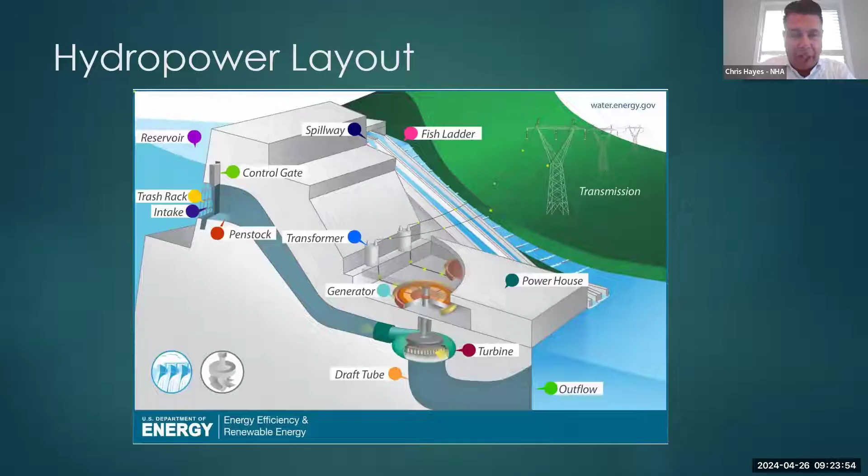And here's a nice picture of a facility operating as it should.

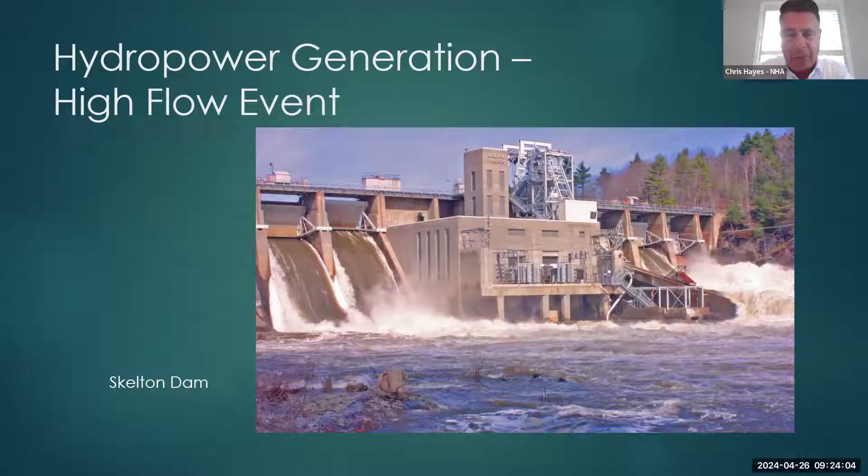So, paving the way for today's presentations, the goal is to identify technologies and innovations that may support the policy gaps identified in Workgroup 2, or shed light on other challenges that could be included in the workgroup's deliverables. Working Group 2 is looking forward to hearing from these presenters and gaining a sense of the options out there to address dam safety challenges.

The three presentations today will focus on how dam safety and natural hazards resilience can be enhanced through innovative collaborative technical assistance programs and emergency action planning; how innovative technologies for underwater dam assessments can improve infrastructure integrity, longevity, and safety; and how applying science-guided artificial intelligence can improve dam safety operations through enhanced forecasting and improved risk management. A very exciting lineup.

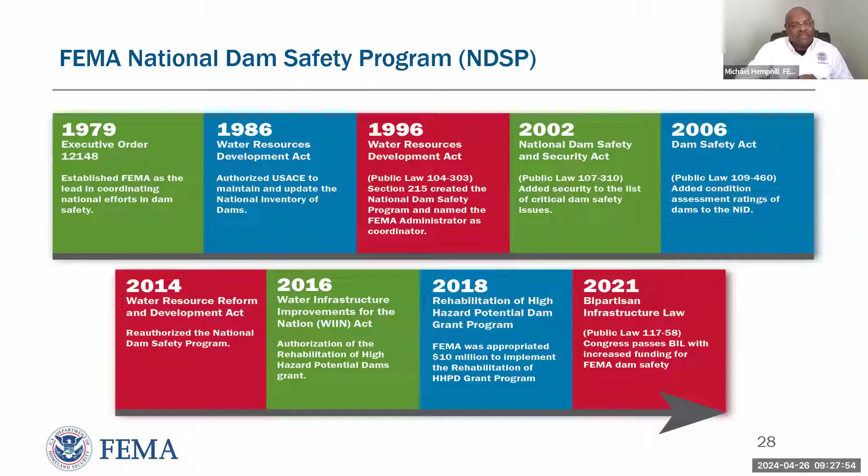Historically, the efforts of the National Dam Safety Program have been primarily focused on engineering. However, for the program to really evolve and be more comprehensive and effective in reducing the risk to life and property from dam failure, it's imperative that emergency managers, planners, floodplain managers, and emergency responders all become informed on national policy in dam risk reduction.

This is something that the Interagency Committee on Dam Safety and the National Dam Safety Program are really striving to do. Even though FEMA is the advisory committee for those entities, it is a national program, not FEMA's program. So we're very cognizant in making sure, and I'll explain this more when I get to the strategic plan, that all the activities we do are holistic, whole-community encompassing, to make sure all key players are at the table when guidance and recommendations are being developed.

As Mike mentioned, the Dam Safety Program aims to reduce the risk to life, property, and the environment from dam-related hazards, and we have 4 key pillars that we stand on. It's interesting because a lot of the things you all mentioned in the opening polls kind of hit within all 4 of these pillars.

So leadership through the National Dam Safety Review Board and Interagency Committee on Dam Safety, and FEMA is the lead for that. But as you know, we do not operate or own any dams. We are strictly in an advisory capacity, leading the collaboration between all the entities that do.

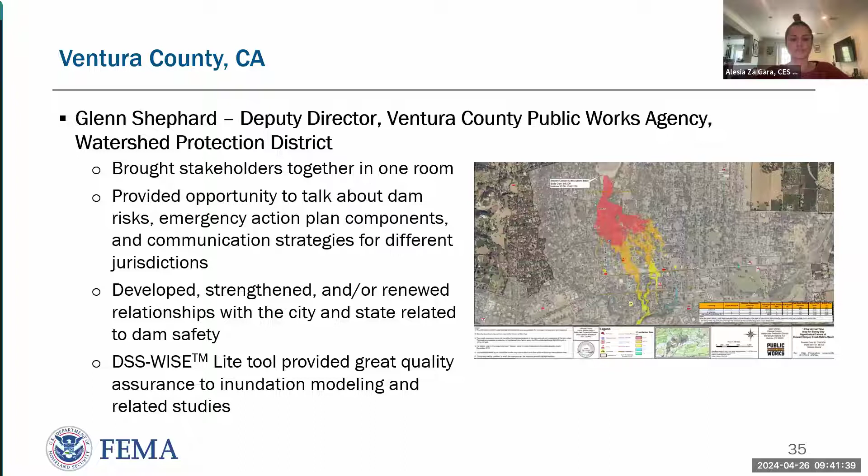Hi, Glenn Shephard, Deputy Public Works Agency Director for Ventura County, specifically the Watershed Protection District. An Emergency Action Plan is a formatted how-to in case a dam is experiencing a failure. Whether you're on one dam or multiple dams, it is key both to the state and anyone who has to plan for disasters. Our enduring relationships with FEMA, Cal OES, and the California Department of Water Resources embraced a new project for collaboration, and the CTA from FEMA allowed us all to come together in one room and talk through the risks and communication strategies affecting different jurisdictions and the emergency action components of how we plan and prepare for disasters. We're all strengthened in relationships either developed or renewed to allow for this project to be completed. DSS-WISE, the FEMA tool, was a great addition, and from a technical assistance standpoint provided great and wonderful quality assurance to modeling and inundation study. We appreciate FEMA bringing CTA to our attention, and with our state and other city partners, it has really strengthened our relationships as it relates to dam safety and communication of risk and responding to a potential failure.

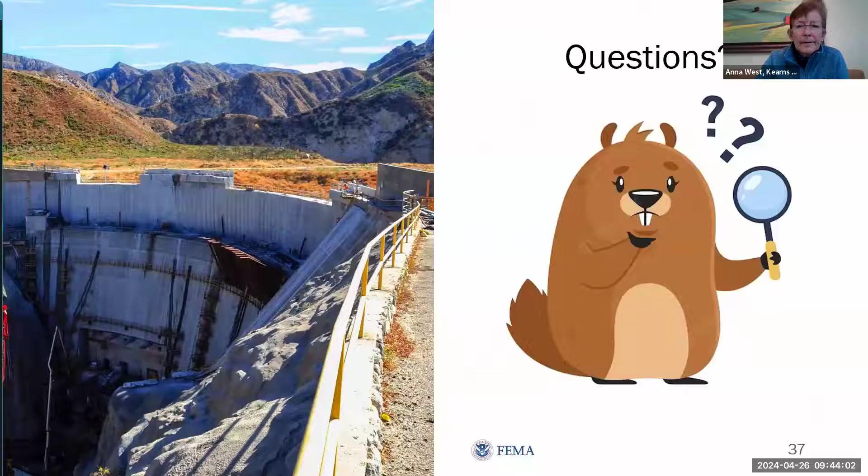Not seeing any hands go up. Okay, well then let's go into our poll everywhere. If everybody could go back to the poll, however you entered via mobile phone or computer. First question is, how could we advance, adopt, or scale the use of the CTA, the assistance program? How can that be advanced or improve the use of it? Looks like people are typing.

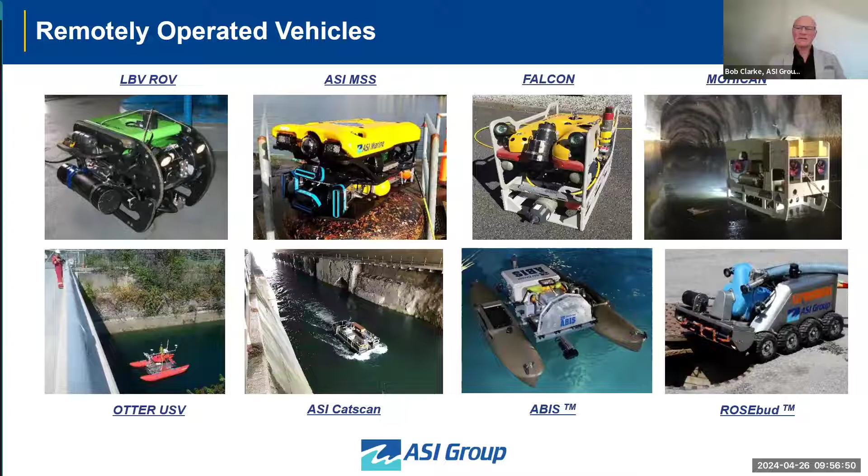It was quite the entertainment when we hit the go button because it took off like a shot up the canal and pretty much navigated itself all the way through for the next 4 or 5 hours by itself. We would monitor it, and if need be, we could jump on just like remote desktop and control it. If it got really sticky, we could run up and do an RC control, radio control, and visually operate it directly. Worst comes to worst, we could shut everything off and do a full manual override. So it could operate in 4 different ways. It was an amazing piece of technology developed for a specific project and has been leveraged for projects since then as well. Next slide, please.

And the benefit of that is it's measurable, so it is true 3D. We can measure - this is roughly an 18-inch pipe. So that's a double check.

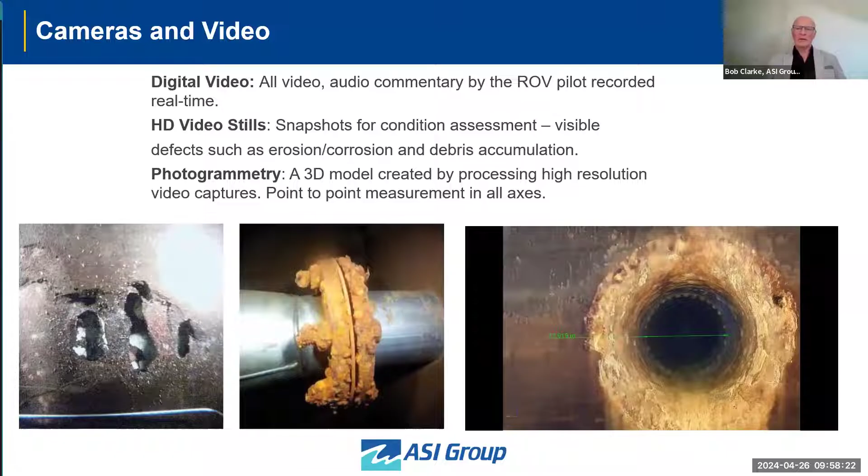Where we don't have great visibility, or where we're looking to cover a very large area, we'll use sonar systems. Sonar is sound - it emits a pulse, comes back, and the sensor receives that signal, that reflection. There's 2D and there's 3D. 2D is like taking a flashlight, shining it across your tabletop, and you get reflections back - bright spots, dark spots. 3D is instead of shining that fan of light across the desktop, we're now shooting a single, very precise, well-defined pulse of sound, and that goes back, hits the target, comes to the sonar, and brings back a point value in X, Y, and Z space.

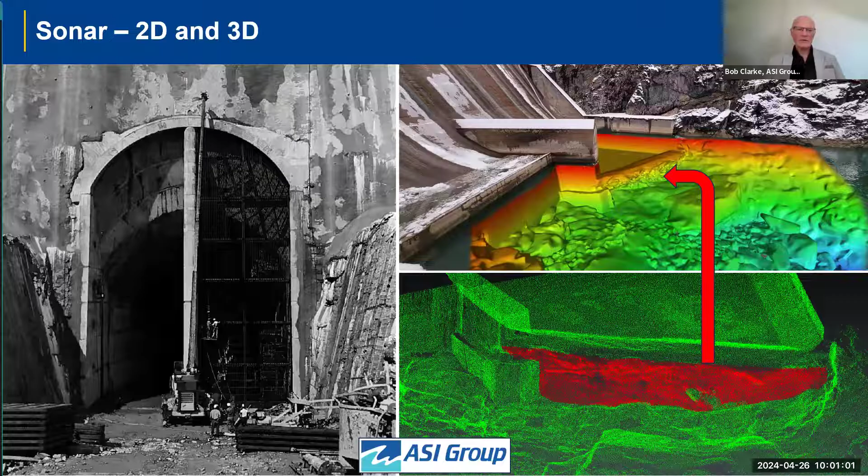The client reached out to us, wanted to apply some new technology, had heard about this sonar thing. So we said sure - transition to the sonar image, please. We went down, and we had to inform the client that, by the way, you don't have any trash racks - they have all collapsed.

With respect to diver safety, it's a huge risk putting divers in when the barrier that's meant to protect them isn't there. Obviously, lockout tagout would have to be done for diver protection. For putting a robot in, it's not as critical, so we can do a lockout without having to go to the full extent. Usually, if we're doing multiple intake units with a diver, the adjacent units have to be locked out as well. With an ROV, we can do a lockout on the single unit, and the other ones generally are left operational, and we can manage the vehicle accordingly.

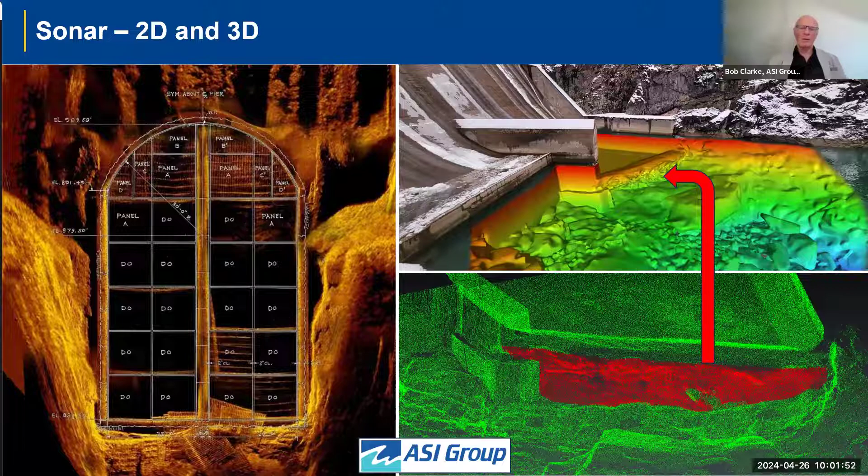You'll see the white drawing put over top - it just helps put everything into context again, so the client knows exactly what's where.

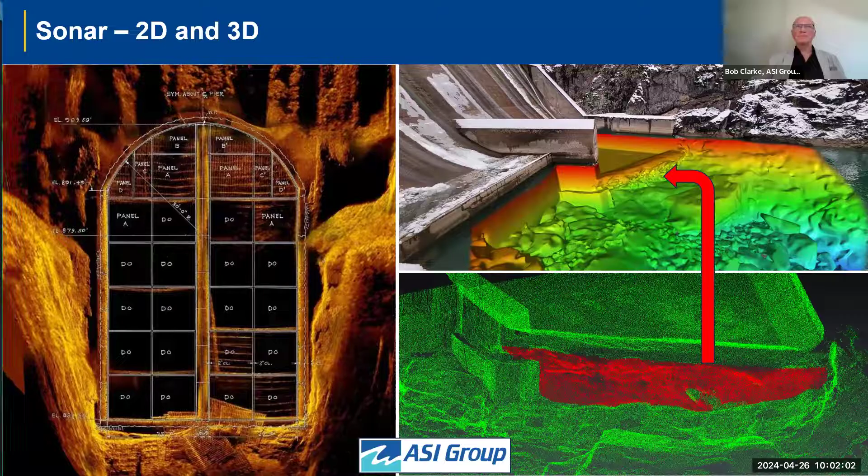This work was done when the area was isolated for safety, because we did use a manned vessel through there.

This puts the whole area into context, something a diver can't do by feel and touch and relaying. There's also more detail. The shadowing and banding in there is just an artifact from creating the image from multiple smaller images stitched together.

But when you really zoom in, you can see individual pieces of rebar in some of those images. The progression of the technology is phenomenal. Some sonar systems now get down to 1/8 of an inch, being able to see that level of detail. It's very impressive.

One of the big applications for long tunnel work, and even for open water areas, is surveying for debris. At the trash racks, we've done many projects where we just go down and check that the trash racks are fine. Like the previous example, those trash racks had failed completely, which was a structural issue of the support beams. Other areas are when debris piles up against the trash rack, overloading it so the head pressure creates significant stress on the structure.

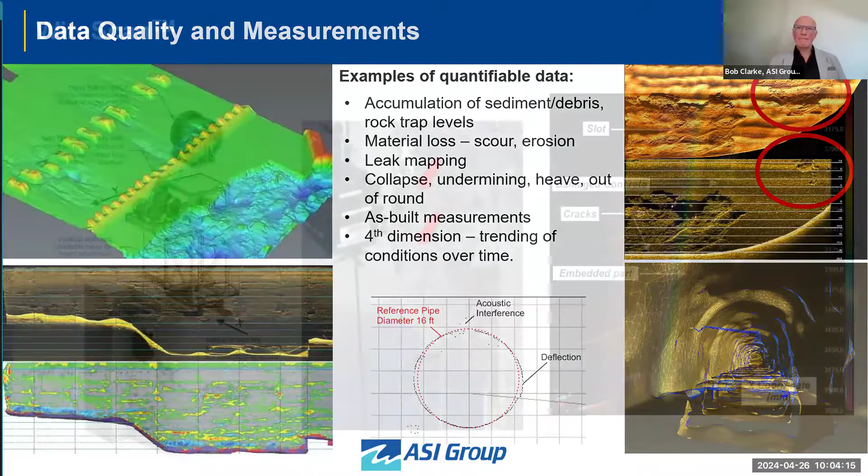As mentioned, some sonar systems measure down to 1/8 of an inch, and you can see little defects. This WireScan system is a bespoke engineering solution developed by Hydro-Quebec that measures down to 1 millimeter.

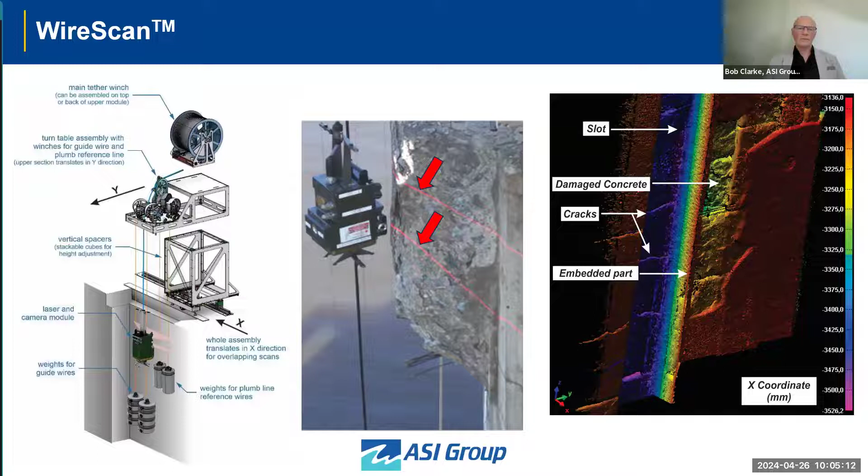As Chris mentioned earlier, being able to operate your gates under an emergency is critical. By taking these highly accurate measurements to a millimeter, Hydro-Quebec ensures their facilities operate as intended and when intended. So knowing the true verticality of those gates and slots, any deformation caused by impact, swelling concrete, or differential settlement, they know prior to even trying to install the gates and slots. ASI has commercialized this, so it's now available outside of Hydro-Quebec, and we've done several projects throughout North America for the owners.

Leaks through dams are obviously a very major concern. Historically, divers would go down and very cautiously wave telltales or bits of string in front of them as they went around looking for a leak.

Finding leaks on a dam is one of the most hazardous things for commercial divers, in fact one of the leading causes of fatalities. With even just a little bit of pressure, the diver can get stuck up where that leak is and cannot come off. So being able to do it with robotics and remote technology provides huge savings and a huge safety factor, especially if there's no visibility.

The examples shown here include telltales and dye injection. For larger areas where we may not have visibility, we'll listen for the leaks using hydrophones. If there's a pressure differential, there's going to be a sound.

The sample on the right is from a survey done in a very large tunnel, 13 feet in diameter. We're not going to look for that needle in a haystack going up and down searching for leaks like we did before, which is a very time-consuming process. Now with the hydrophones, we can deploy the full array, go through the tunnel listening for leaks, map them all out, and then go back to visually confirm. We don't have to look for them, we're listening for them as we go through.

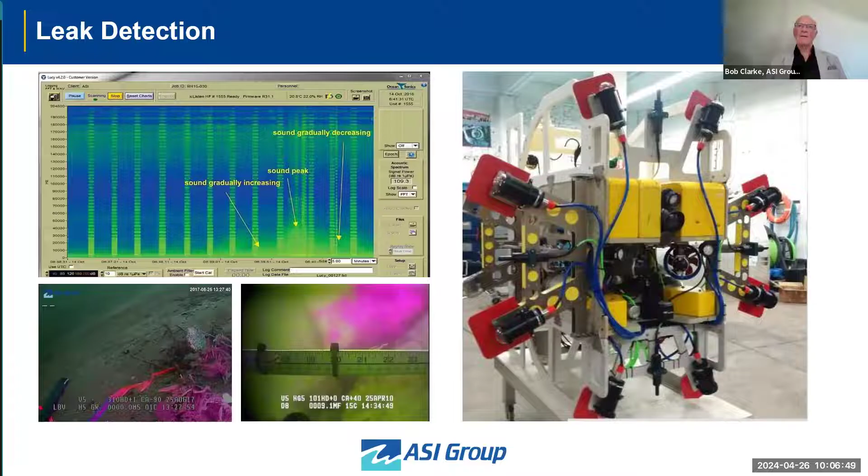This is the most recent bit of technology that we've brought to market, through a partnership with Vector Construction Services, NDT division. We are now able to test concrete integrity underwater without having to core. It's a non-destructive method: we put transducers against the wall, impart an energy, and listen for it. Based on how that signal is received by the other transducers, we can determine the strength of the concrete and where there's a liner thickness, including the residual thickness in the concrete.

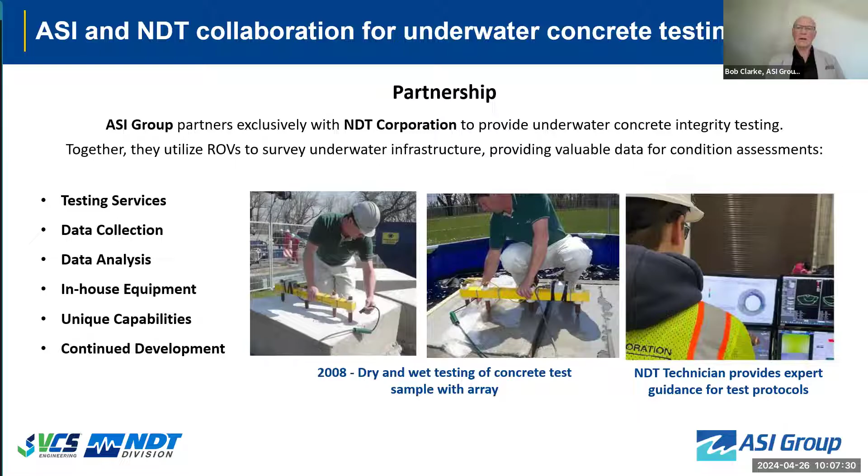Just an example of some of the research and development—about a 1.5 year program. Some of the beta testing is shown on the left side, and it's finally integrated onto a remotely operated vehicle. It's been used for an assessment, which was a very interesting project. Aging infrastructure and life extension programs are a big thing—owners want to know if the concrete is still good, or if redesigning and repurposing, what is the strength of the concrete. That's where this project was done, shown on the right side.

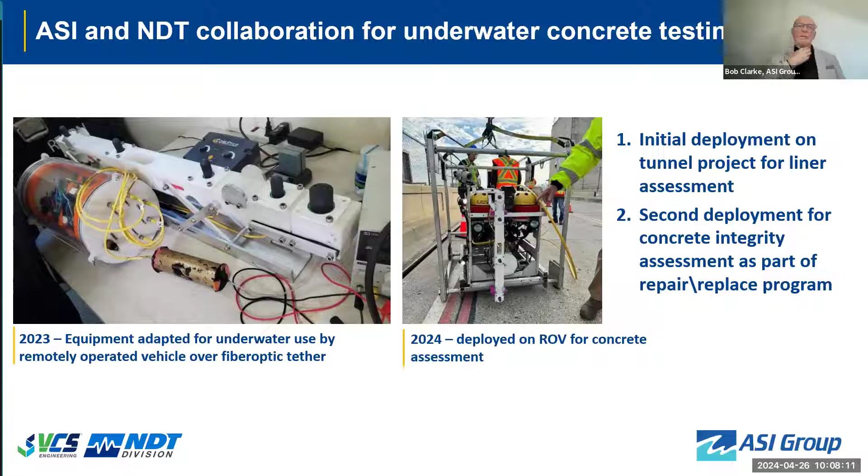We're able to go down and collect multiple points, highlighting them in a table for the owners and their engineers. Everything in red was below the criteria set by their design team, and they're able to do their design based on real information as opposed to assumptions.

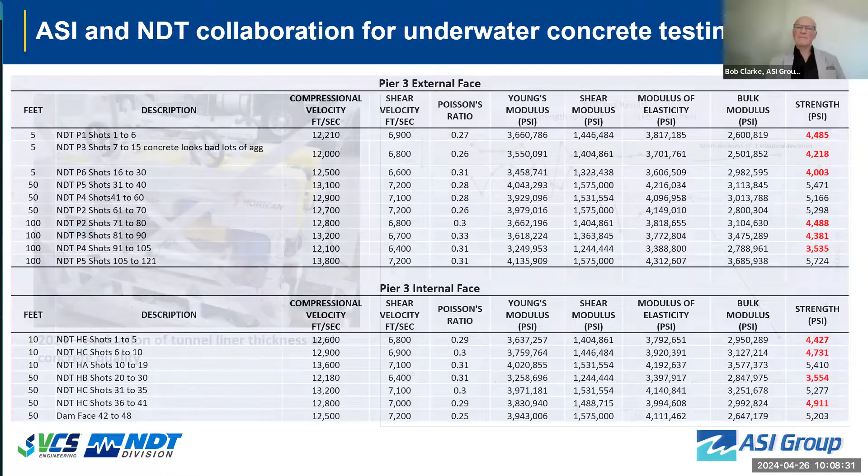This was specifically made to be integrated onto robotic vehicles, so we're now capable of going 8 miles into a tunnel and still doing concrete assessment the whole way. This project was a shorter tunnel, only 18,000 feet, but we were able to go in and do liner thicknesses and concrete strength. Generally, the values that come back are within 500 psi of test and calibration cores. It's a great way to do concrete assessment non-destructively and quite quickly, in areas simply inaccessible to divers.

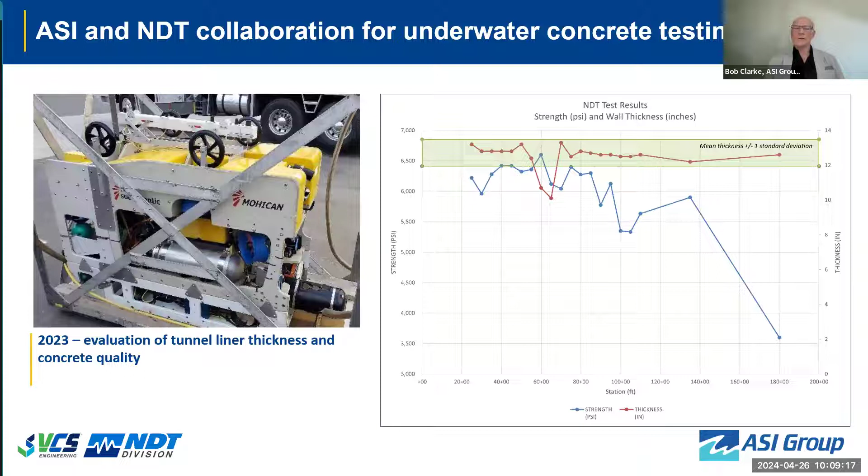And pretty much wrapping the presentation up—it's not just about getting data, it's about actually doing work as well. The robotic vehicles can be modified to help go in and repair directly, or even to assist with repairs.

One of our highlight projects was down in South America at the Cheves Power Station plant in Peru, where they had leaking piping from their penstock. In order to isolate that piping, they wanted to decommission it all, and the only way to do that was to put a plug in from the inside of the penstock. That location was roughly 6 miles down a tunnel and close to 2,000 feet of water depth. There was no other way of doing it unless they dewatered the whole facility, which is unsafe—they would also have lost revenue and faced a host of other issues.

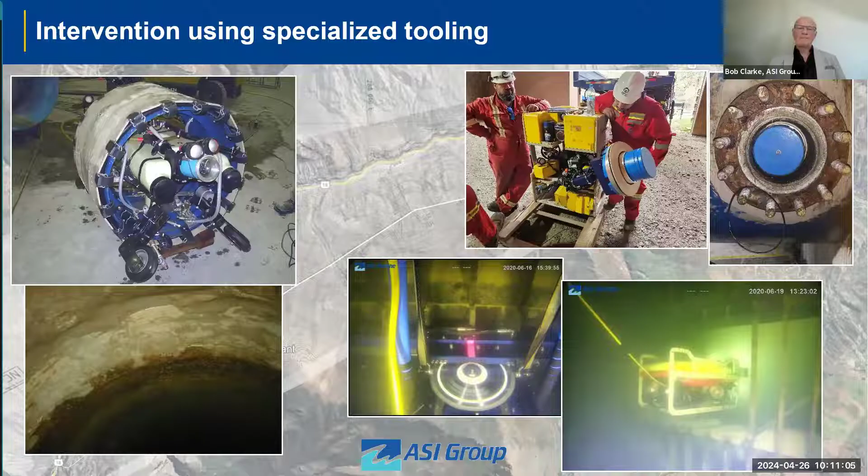So basically, just summarizing: robotic systems and remote technology can be used in areas that are inaccessible for conventional means and divers, and or areas that are high risk.

It's data that can be acquired on the inspection side of things that's recorded and logged. Now you've got a history, so over time comparative analysis can be made to see if there's progression of anomalies, or hopefully everything's fine. But now it's also documented.

Having that information goes a long way with insurance as well, because now it's a two-sided juggle: owners can demonstrate to their insurance agencies that we've inspected everything and it's fine, and the insurers can now mandate that it be inspected, which also ensures their risk is fine.

One of the things with the technology, especially the long distance aspects, is that FERC used to be able to grant waivers for long tunnel systems because the technology wasn't there. It was very cost prohibitive to dewater these things, so waivers were granted—don't worry, if it's still working, then that should be fine.

Now the technology is there, there is more of a push to require inspections for these types of things. And just again, in summary, it's not just the acquisition of data, but also the ability to do some actual work, intervention, and assist with repairs and maintenance.

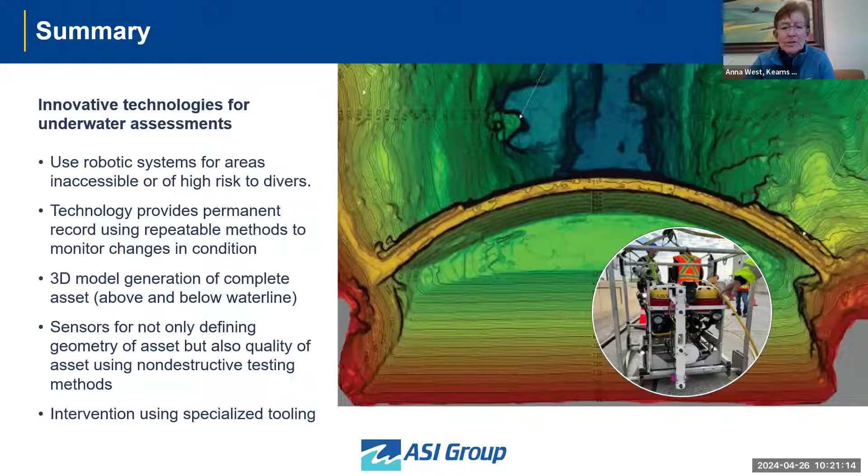So we're kind of having the conversation about how do we advance, adopt, or scale the use of all these technologies Bob's shared with us. If participants have ideas, please fill it in. And Bob, do you want to try to answer that? I think that, as mentioned, these types of programs are key. It's just getting the information out there.

Been attending trade shows since joining ASI, and it is interesting. Clients have rotation of personnel, so new people come in and they're not aware of it. So now they get introduced to the technology, and even those familiar with it get the updates as to what's new. That's one of the things with a service provider.

The service provider has to maintain state-of-the-art equipment. It's not uncommon that owner operators, they can do that - they go buy the equipment. Problem is they don't have to maintain state-of-the-art equipment, and they also have higher turnover than a service company would. It's not uncommon that owner operators buy a small ROV, which is great for something quick and dirty, but then they start progressing and getting more advanced systems that they don't know how to maintain. It's not operated on a daily basis, and people lose their expertise with it.

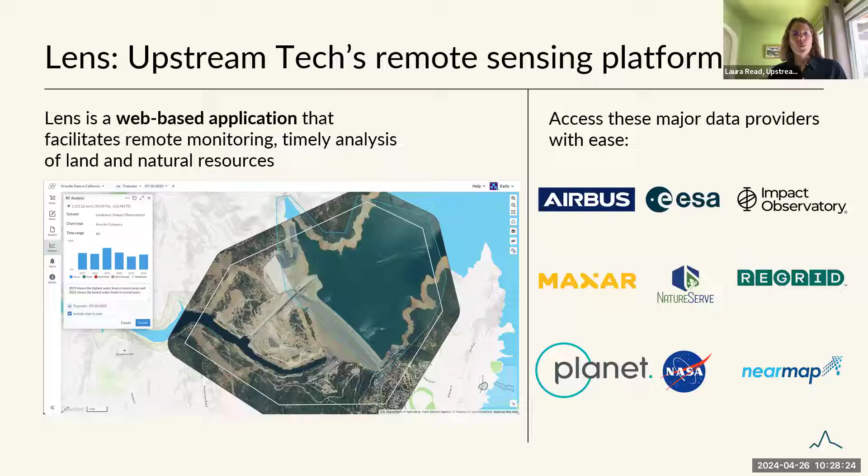Just one quick note on Lens. Lens is our other product, the one I won't focus on today, but essentially it is a remote sensing platform that folks are using to monitor different types of land or water, shoreline, or land that they need to monitor remotely because it's difficult to get there, or they need really specific high resolution analytics and data. So these are some of the data sources that we pull in and make into a really easy to use platform.

So motivation for HydroForecast - why did we build it and what is it? Essentially two pieces came together to create a perfect storm for building this product. The first is that managing water is really difficult, and it's becoming more difficult if you're in an area experiencing changes in climate and variability. Lots of high-profile news stories show how difficult it is to manage water through events and droughts. The other piece is that water is used and is becoming an even bigger part of the pie for power and electricity generation.

So we have these things happening, and we also have advancements in computers, technology, and AI. Folks are fundamentally making different types of models because more data and faster technology is available. So the question is, how can we use that in conjunction with the water and energy crisis to really move the needle to help with managing these challenges we face globally?

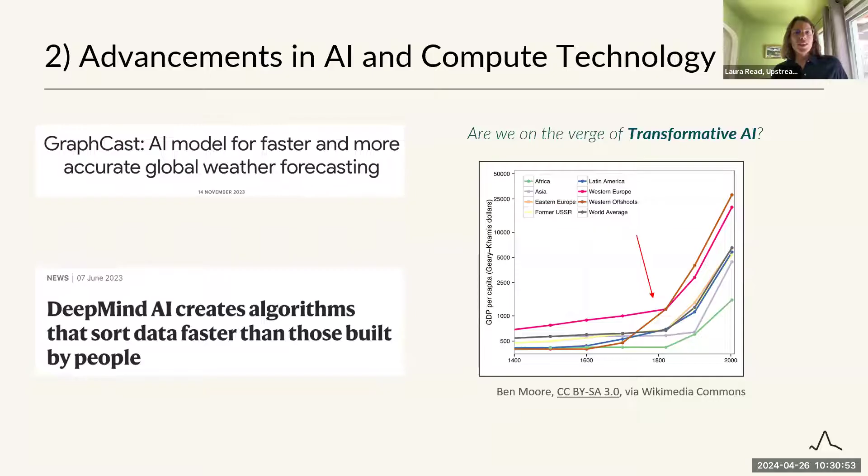So the culmination of water challenges and needing better information to manage our water, especially as water becomes more precious from a power perspective, plus the availability and advancements of computers and AI - what can we do with that to leverage both? HydroForecast is essentially our answer to that. We've built a model in a fundamentally different way using AI and neural networks that can be used for better predictions of water, stream flow, inflows into reservoirs, etc. And from there, even other renewables - how can we forecast those as well so that we can help build that portfolio of a reliable grid?

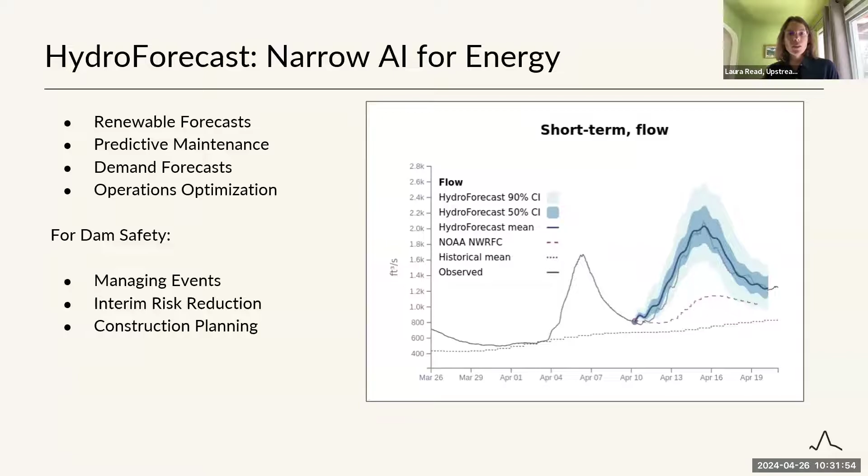So today, in the remaining part of this talk, I'm going to show some examples of how folks are currently using our forecasts for managing dam safety - in terms of events, construction planning, and interim risk reduction. Before getting to those applications, let me briefly describe a little bit about HydroForecast and what makes it unique.

So briefly, in a one slide summary, essentially what we've done with HydroForecast is said, there's this way that we've always built hydrologic models. Hydrologic models meaning you're able to predict stream flow and use that prediction to manage your water. The question is, how can we take a new type of model and some of the advancements in data availability, neural network speeds at which you can run experiments and integrate new R&D, and see if we can train a model to learn hydrology in a fundamentally different way.

So here on the left, I'm showing what we do in terms of weather sources. Our model takes into account 4 different weather sources and uses that precipitation, temperature, humidity, all the things that drive hydrologic prediction, but it uses more of them, and it's actually trained on them. So it learns how to deal with the errors and the biases.

It also pulls in, in the bottom left there, snow observations, satellite information. So we're using that in real time. And that's all possible because that data is now more reliable, it's coming in faster, more frequent, and it's better quality.

So we're pulling those things in a way that helps train a really big model to learn hydrology fundamentally. And when it does that, then we can go use local information and build a really, really accurate, specific model. So that's what I'm showing here, how we leverage all those different weather technologies and sources with remote sensing sources to build hydrologic prediction.

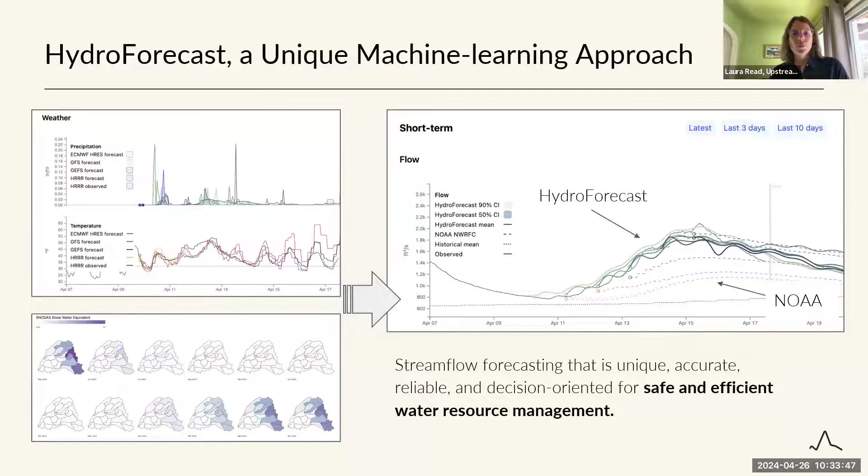And so over on the right, it's just an example of our forecasts over a big spring event compared with what else is out there from NOAA. Next slide. And so the question is, does it work?

One answer to that is that we were put in a year-long competition called a forecast rodeo. Everybody submitted their forecasts every day for a year across 19 sites. A third party validated these results, and different players, public and private folks, entered this competition. Our forecast did pretty well across the different locations. For a small company like us that's trying out this new technology and trying to innovate in this space and build that community, this was a really important milestone for us.

Next slide. We work with folks, and basically after that competition, and as we've started working with customers, we have lots of different customers in the utility space globally and across 14 countries, including folks that work on the power supply side and also just water supply.

I'll focus today on showing some examples from our short-term model because that's the most applicable time horizon for dam safety. But we also have seasonal forecasts and a long-term projection that goes out to 2100 to understand how flows can change in terms of future long-term out projections.

Next slide. So I'll walk through two different applications. The first one is with Tacoma Power. They're one of our customers, we work with them. They have snow and rain-driven basins up in the Northwest United States, just south of Tacoma, Washington. And they have some basins that have downstream consequences for floods.

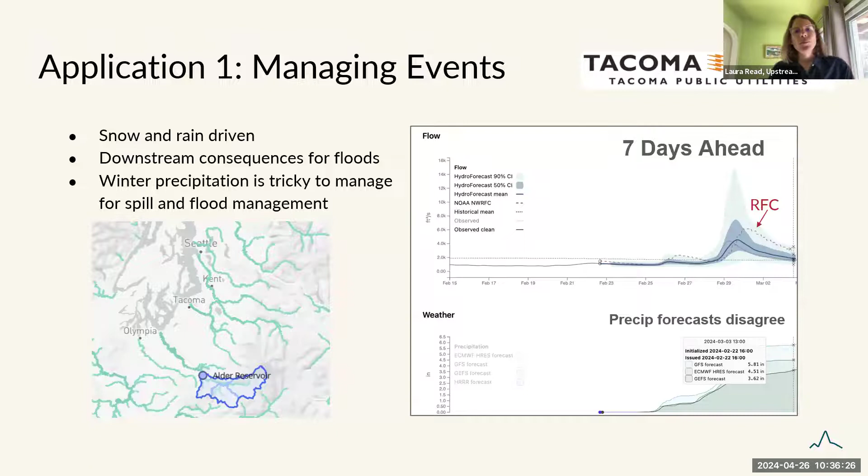Okay, next slide. So yeah, the second application is we have a customer named Valley Water.

They're in the Bay Area of San Francisco, and they are using our forecast for managing events as well as construction. They're doing construction on some of their facilities, and that can be a really critical time for having an accurate forecast. They're a little bit different than Tacoma Power.

They're in a really urbanized area, very flashy basin, and they're also responsible for helping issue emergency warnings if they were to have an event that could put a downstream population at risk. Flows can go from 20 CFS to 1,000 CFS when they get atmospheric rivers, so it's a very difficult area to forecast.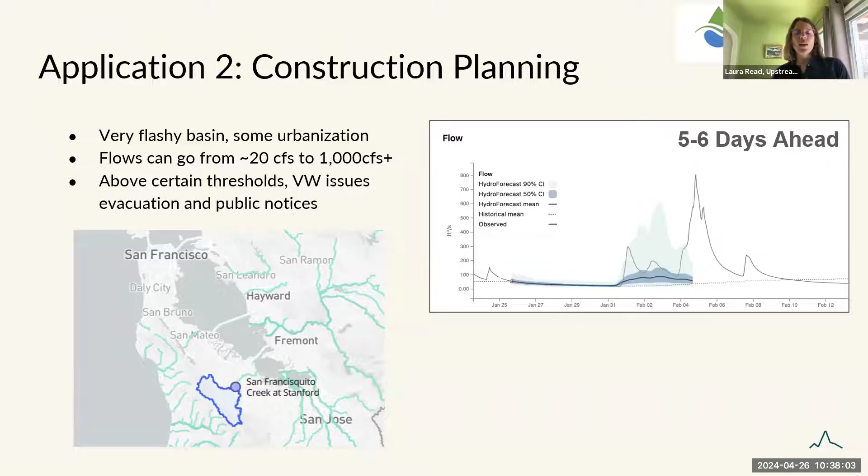Here I'm just showing, this was over the recent winter, an atmospheric event comes in 5 to 6 days ahead. You can see something's coming with that 90% confidence bound. Next slide.

And then as we get closer, 2 days ahead, and then with that second peak, the model is able to pick up, especially within the 50% confidence bound, the likelihood of having a serious event. You can see the flows up to almost 1,000 CFS there.

So what this means to our customer is basically being able to prepare for this and make sure there's no equipment, no folks out in the rivers. They can start working with their emergency management a little bit earlier to maintain safety around these events. Okay, next slide.

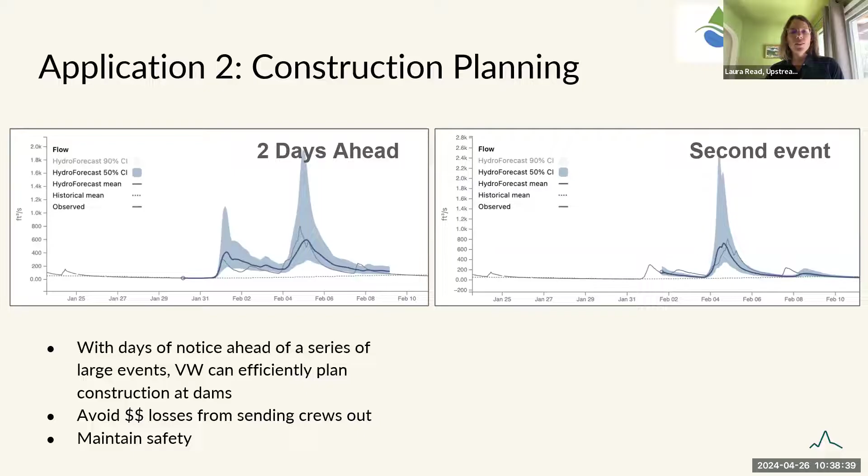And so to bring it back up a little bit to Uncommon Dialogues, essentially the 3 R's that are the crux of this conversation—rehabilitation, retrofit, and removal—are things where hydroforecasts could help with some piece of that. If you're rehabilitating an area and wondering what the long-term potential is, you can use our projections to go out to 2100 to better understand what flows could be like on that time horizon.

As well as if you're working on retrofitting a dam, we have folks doing construction, doing interim risk reduction, and using our operational forecasts has been helpful for the short term and the seasonal outlook to make sure things are not going to get worse.

And then for removal, if you're looking at how flows will be without this dam, getting the natural picture in a stream or river after removal, our forecast can be used there. And last slide.

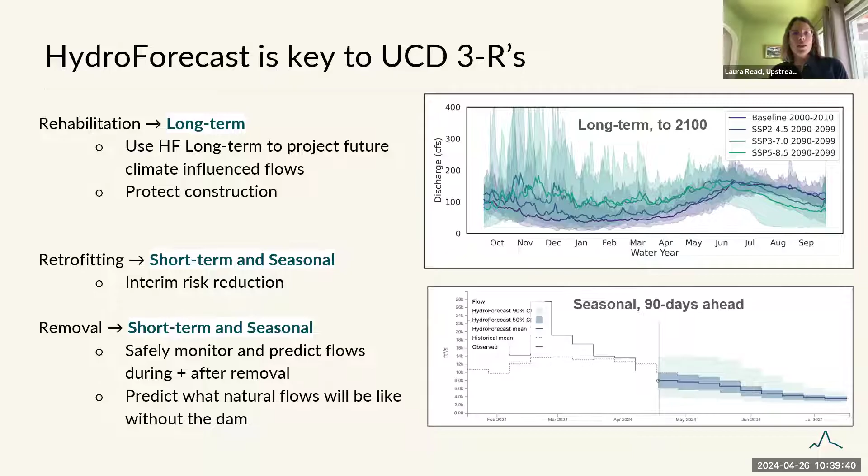If you're interested, we have a pitch—our CEO gave a talk on promises and pitfalls of AI. We're not just a tech company that's promoting AI largely and broadly, so check that out if you're interested. And thanks so much.